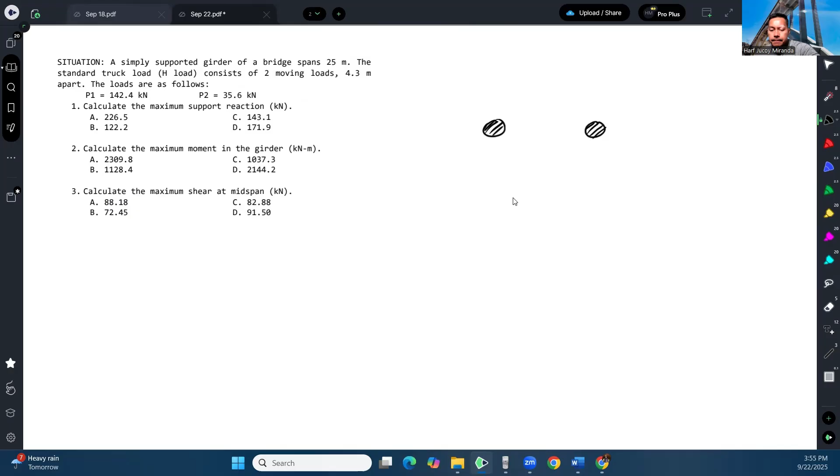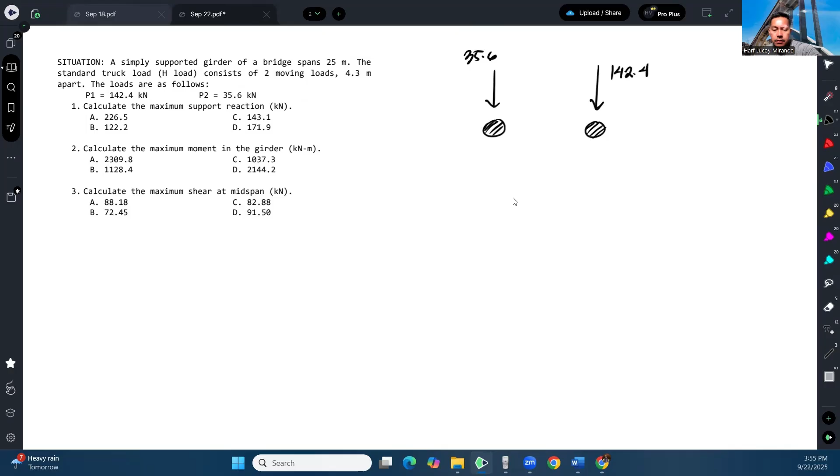Let's say these are the two moving loads. Let's say this is the heavier one, P1, and this is the lighter one, P2. According to the problem, they are 4.3 meters apart. So let's say this is our girder, 25 meters.

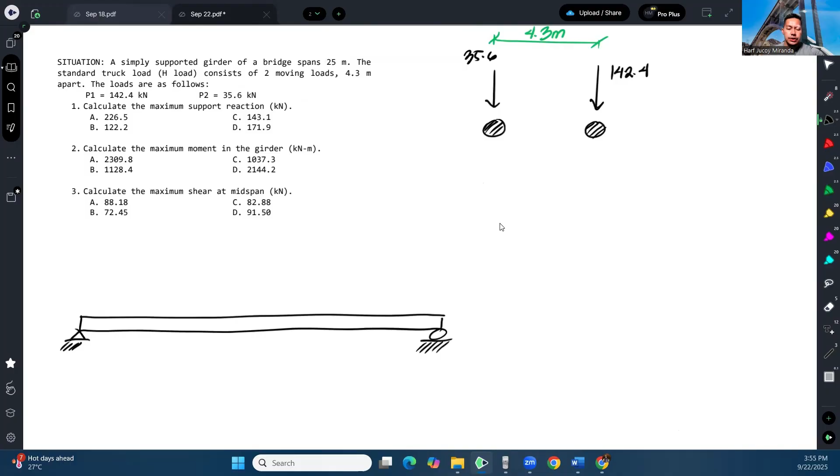So the first question: what will be the maximum support reaction? If you don't have any knowledge about influence lines yet, it's still easy to think about how we can get the maximum support reaction.

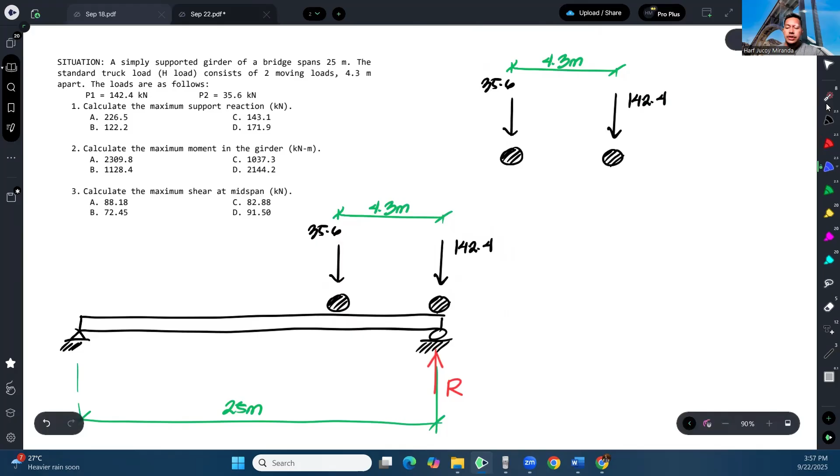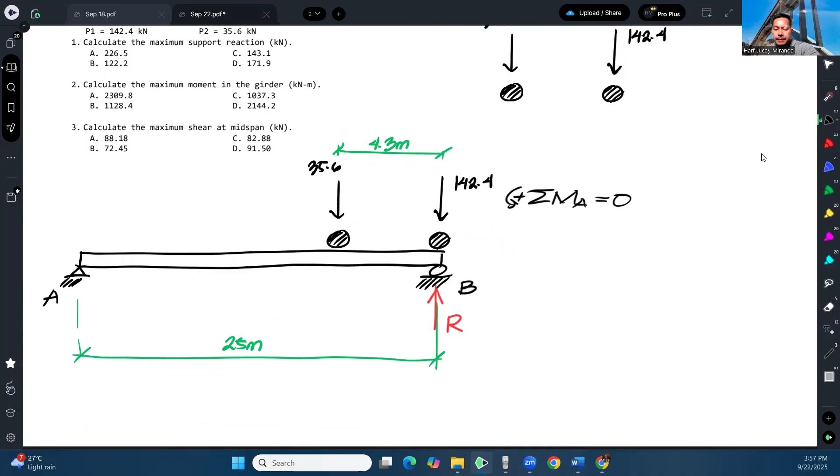Assuming counterclockwise is positive: we have 35.6 times the moment arm, which is this distance — that is just 25 minus 4.3 meters, and that is clockwise. Then 142.4 times 25, also clockwise. And then R will produce a counterclockwise moment. So that will give us our maximum reaction.

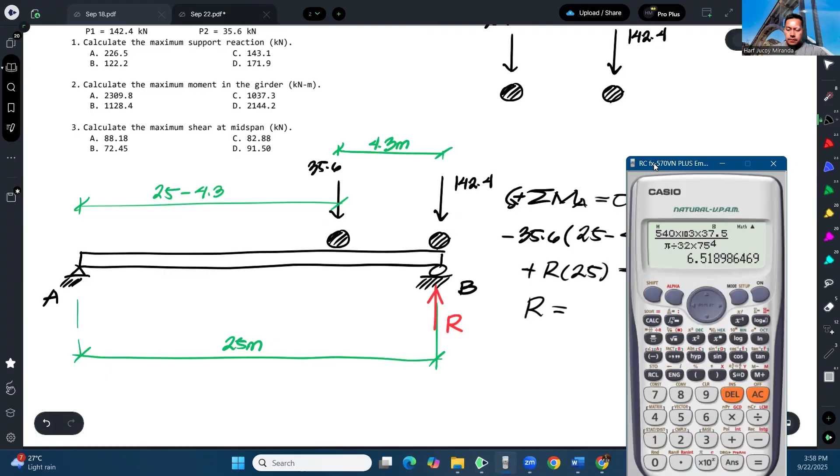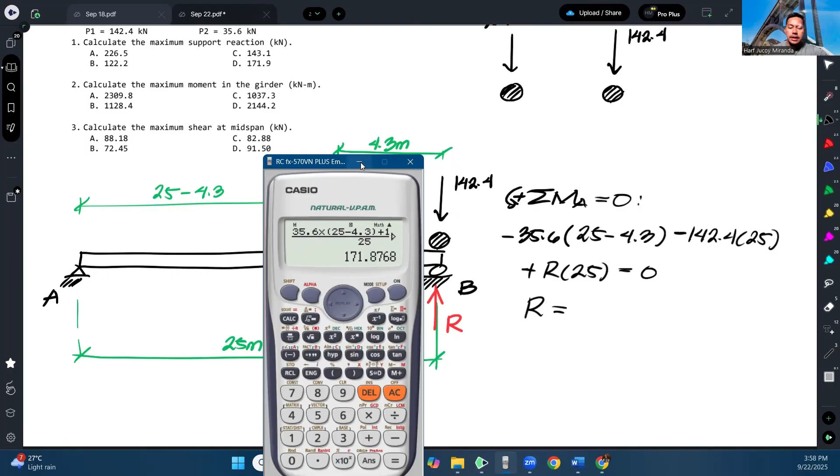So we have 35.6 times (25 minus 4.3) plus 142.4 times 25, over 25. That gives us 171.88 kilonewtons, and that will be our answer for the first question.

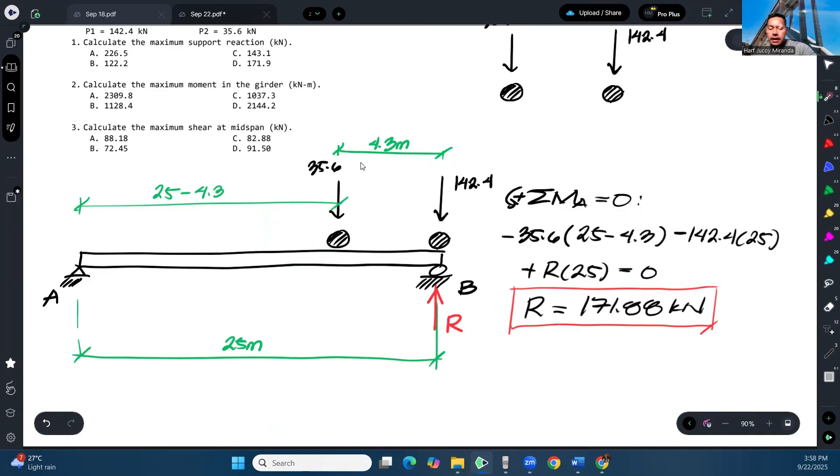So to get the maximum support reaction, we place the moving load right at that support, provided that the load you position there is the heaviest one. Then the other load, you want it to still be on the beam as well.

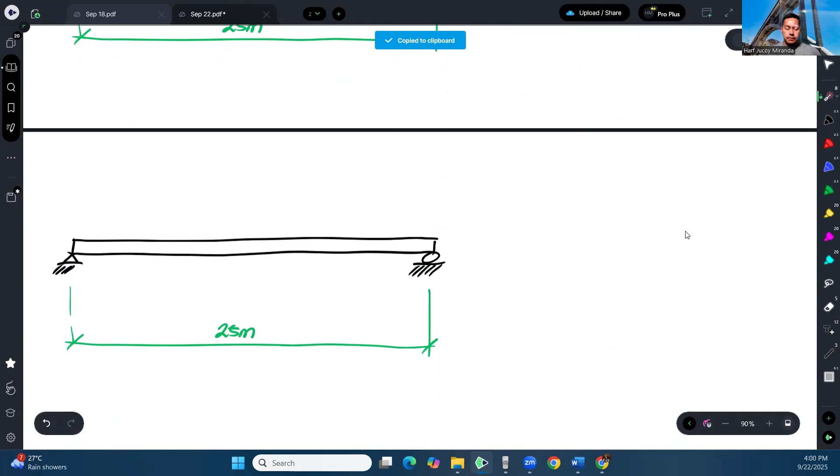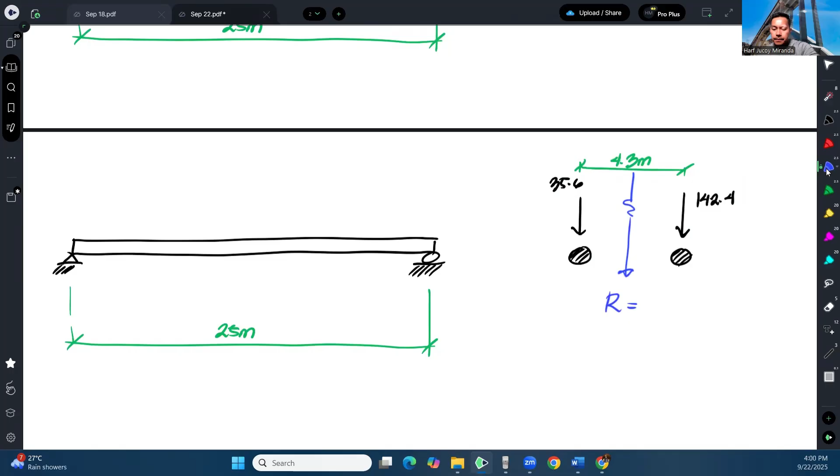Let's put the resultant down here. Let's say this is the resultant, R — which is just adding the two together: 35.6 plus 142.4. So that is 178.

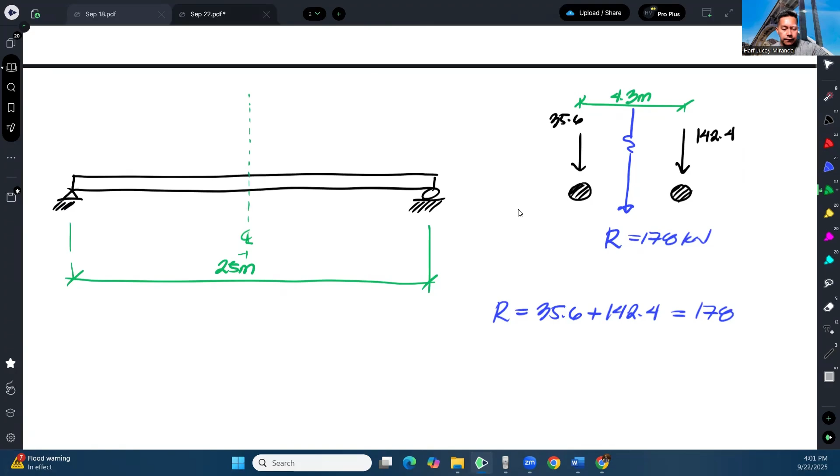So the rule to produce the maximum bending moment in the beam is that the center of the beam — this is the midpoint, so half of 25 is 12.5 on each side — the largest load and the resultant must straddle the centerline of the beam, positioned at the center like this. Once positioned that way, the maximum moment is found under the largest load, not at midspan — it's under the largest load.

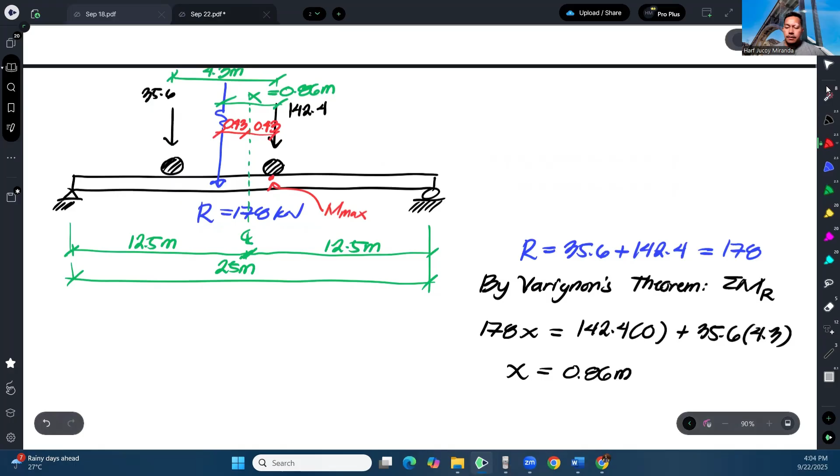Okay, in that position, let's solve for the reaction at B. So magsasummation tayo ng moment sa A equal to 0, assuming counterclockwise positive. Lipat ko lang to.

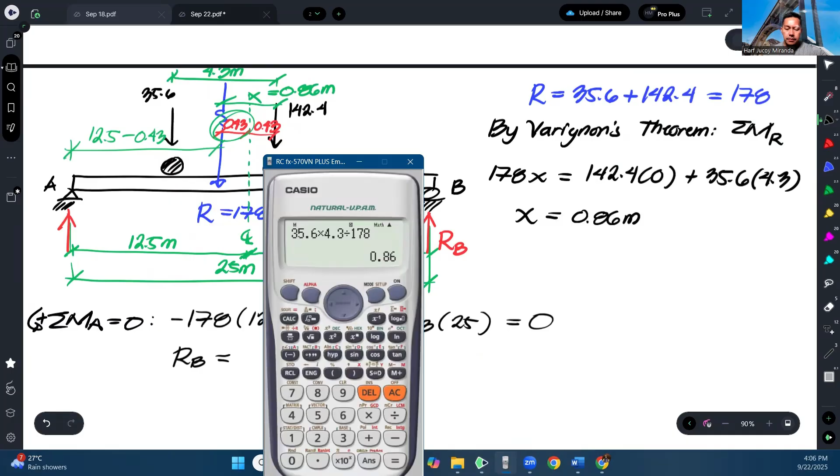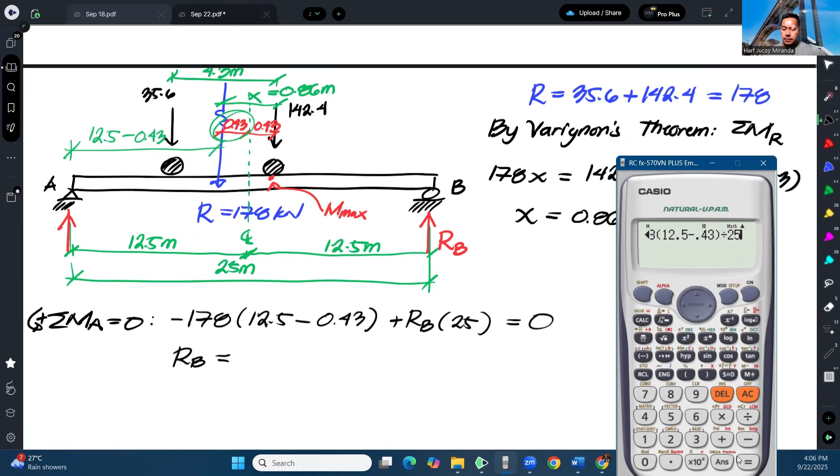So that is the reaction at B, 85.938.

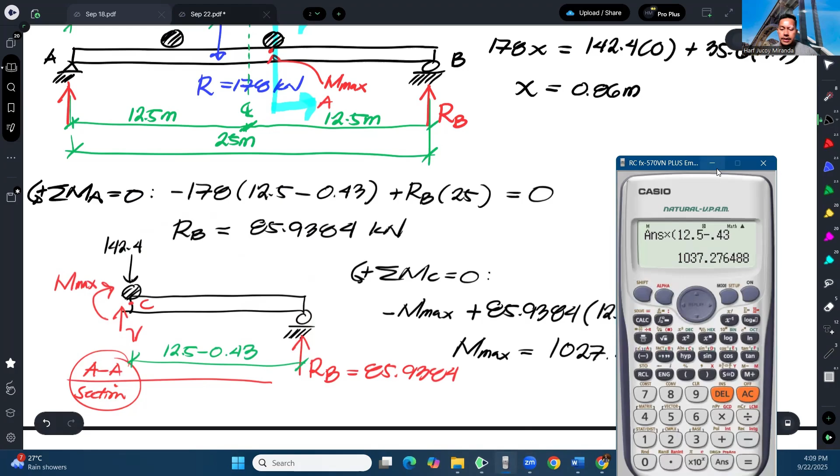Okay, and that gives us 1,037.28. 1,037 pala. Kilonewton meter. So that's our maximum moment. Okay?

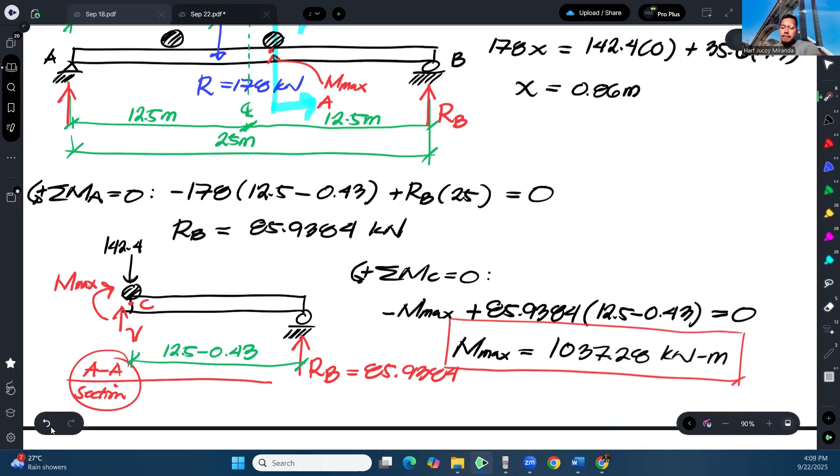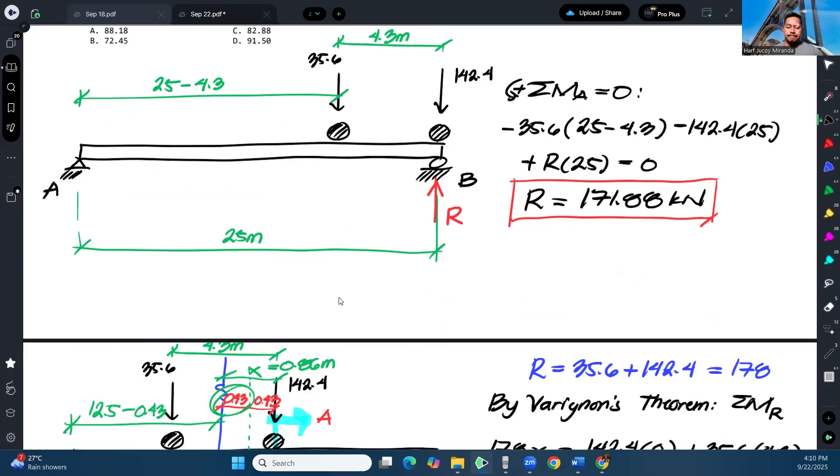So kanina ang sagot natin ay 171, tapos ngayon 1,037. Okay? So that's how we determine yung maximum moment kapag dalawang moving loads.

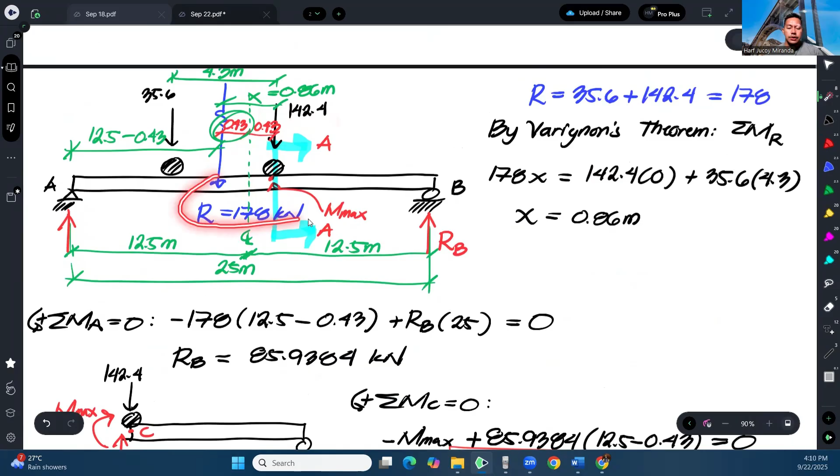Kapag tatlo or more, same idea guys. Papagitnaan natin itong center line ng beam nung largest load at nung resultant force. Okay? So that's how we determine the maximum moment.

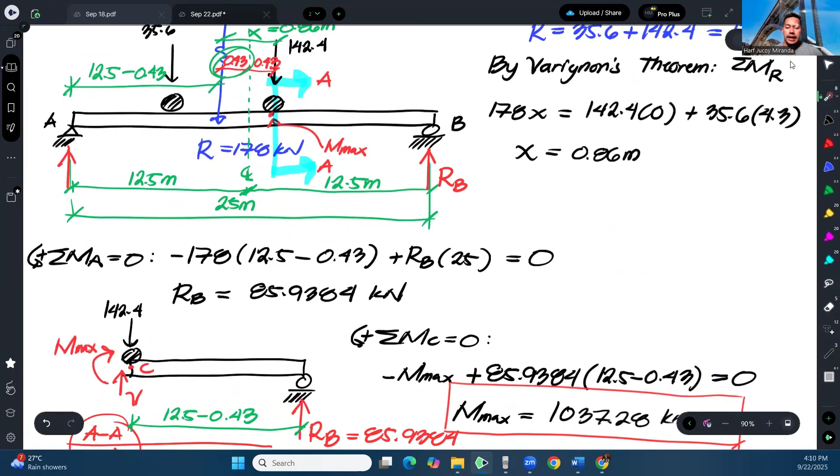Okay, alam ko may formula dito, kaya lang hindi ko recommended na i-memorize nyo yun kasi hindi siya sustainable. Unang-una, para lang yun sa specifically dalawang moving load. Kapag tatlo na or more, hindi mo na yun magagamit. Yung formula na meron, medyo mahaba rin kaya ayoko siyang i-memorize.

Okay, pero pwedeng i-derive dito kung gusto nyo. Bali, uulitin lang natin to lahat, pero magiging variable lang to lahat. Magiging R lang to, P1 to, P2 to. Mas makukuha mo yung X in terms of R, P1, and P2. Tsaka yung length pala, yung distance between them.

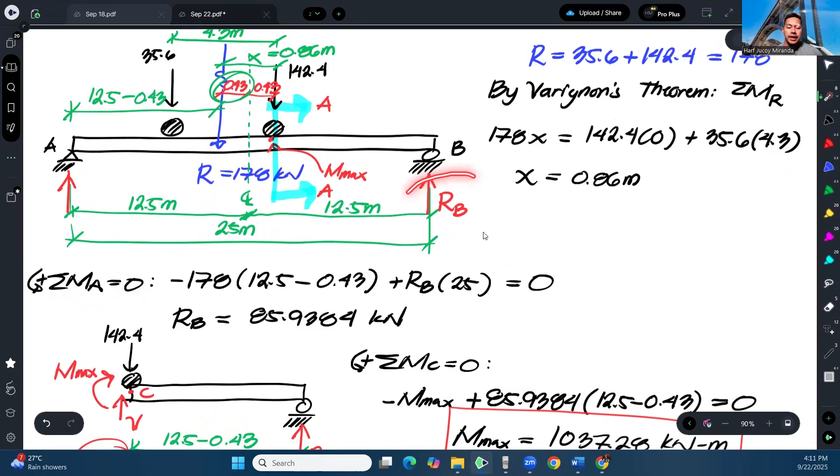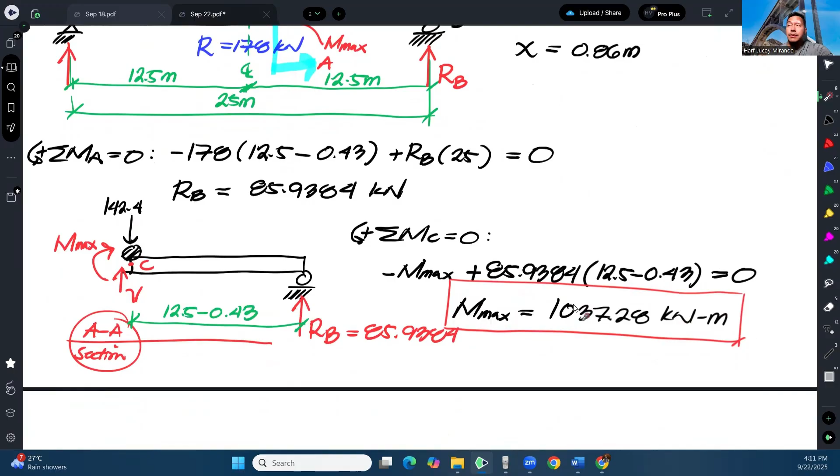Ito lang mismo ang gagawin. Mag-moment tayo, magka-cut tayo dito. Kukunin mo muna yung reaction, so makukuha mo yung reaction in terms of P1, P2, tsaka resultant. Tapos pagkatapos nun, magka-cut ka dito. Tapos pag nag-moment ka dito, you can solve for the Mmax, in terms of P1, P2, yung distance between them.

Okay, so that's for number two. For number three, what is the maximum shear at the midspan? So ano naman daw yung maximum shear sa midspan? Nakaspecify na sa midspan yung hinahanap. So malamang, ang gusto natin gawin dyan ay ipatong itong largest load dun sa midspan mismo. Okay, so yun yung idea. So gawin natin.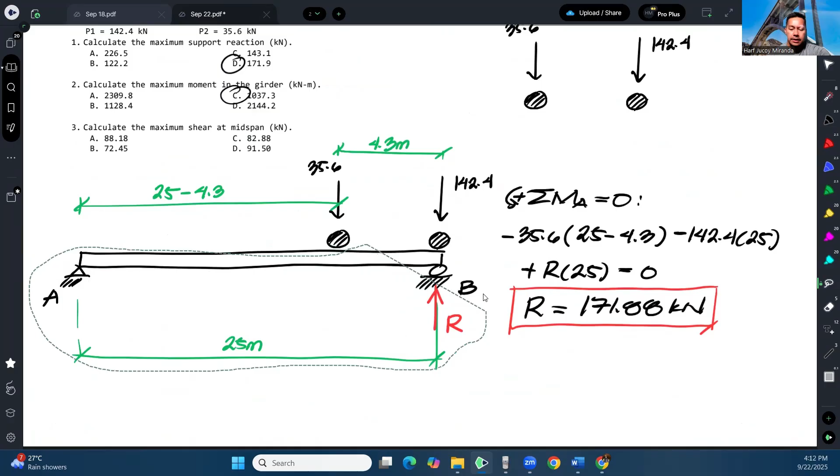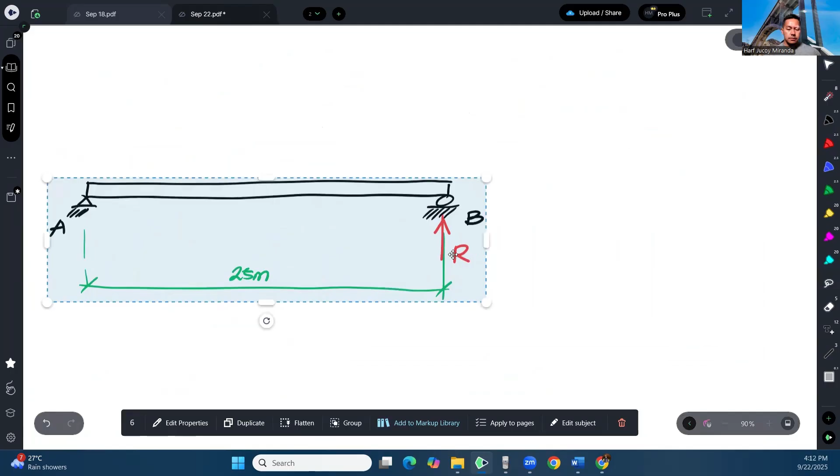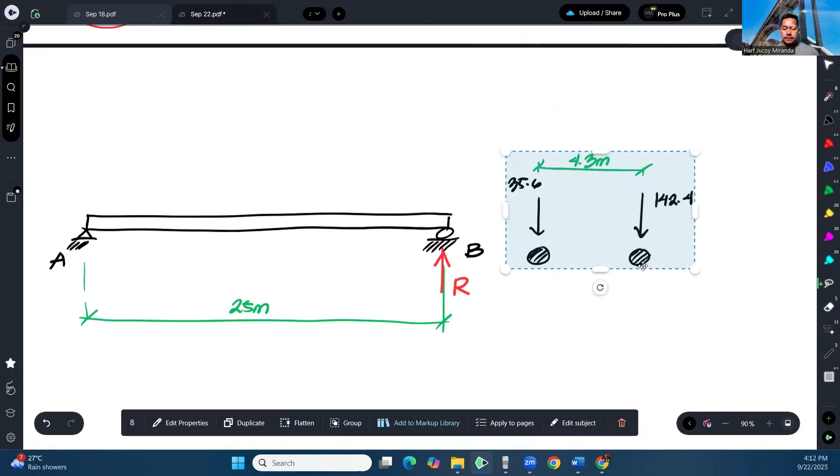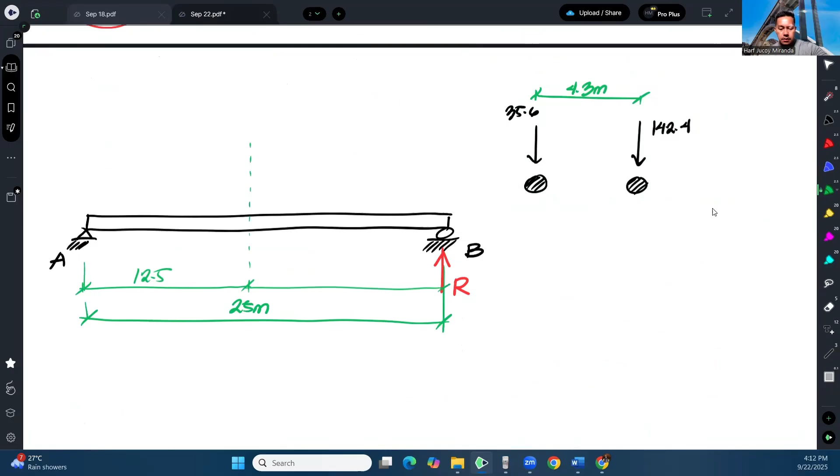Open ko lang tong beam na to. Ayan. So gusto niya sa midspan. So di ba ito yung midspan? Gitna to. Ayan, shear sa midspan. So lalagay natin dyan. Patong mo siya dyan. Ayan. Tapos hanapin natin yung shear dyan, okay, sa midspan, in that position.

Alright, so para makuha yun, once again, kukunin ko lang yung reaction R. So mag-moment lang ako sa A, again equal to 0, assuming counterclockwise positive. So this time, ano na to? Pwede natin kunin yung resultant ulit. Di ba yung resultant nandito? 178, so pwede yung resultant na lang ulit yung gamitin natin.

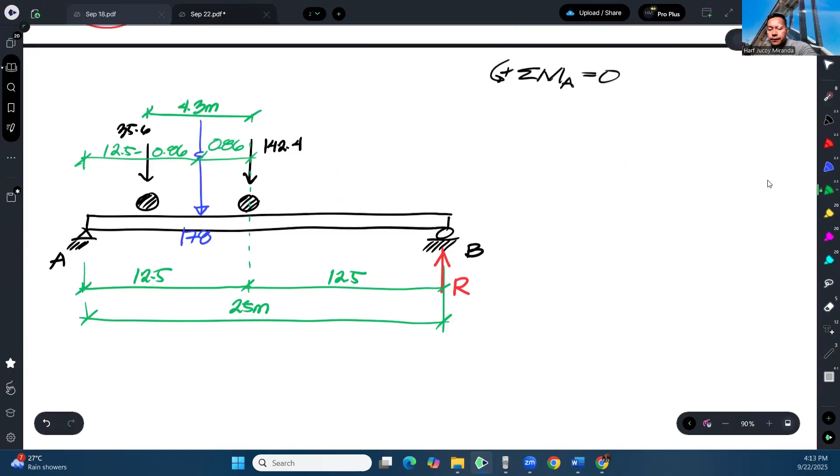Tapos ito, 0.86, di ba? So ibig sabihin, yung distance ni resultant from the left ay 12.5 minus 0.86. So therefore, we have 178 times 12.5 minus 0.86 clockwise, and then yung reaction sa B times 25 counterclockwise. So we can solve for the reaction at B.

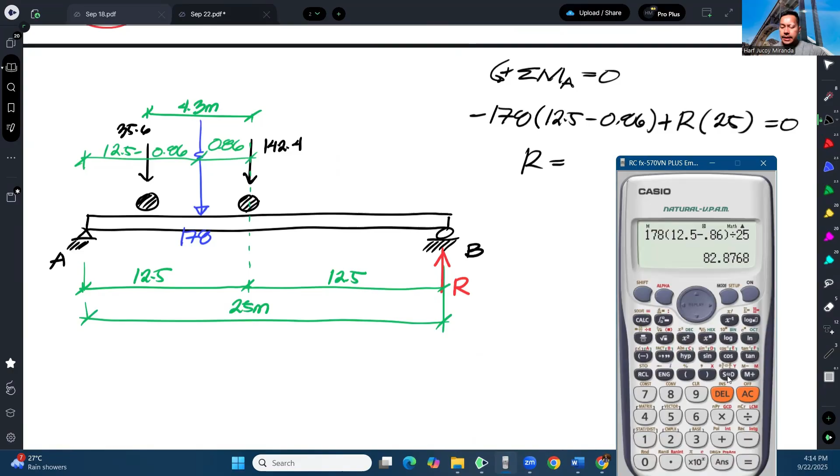So that is 82.88 kilonewtons. So yun yung reaction dito.

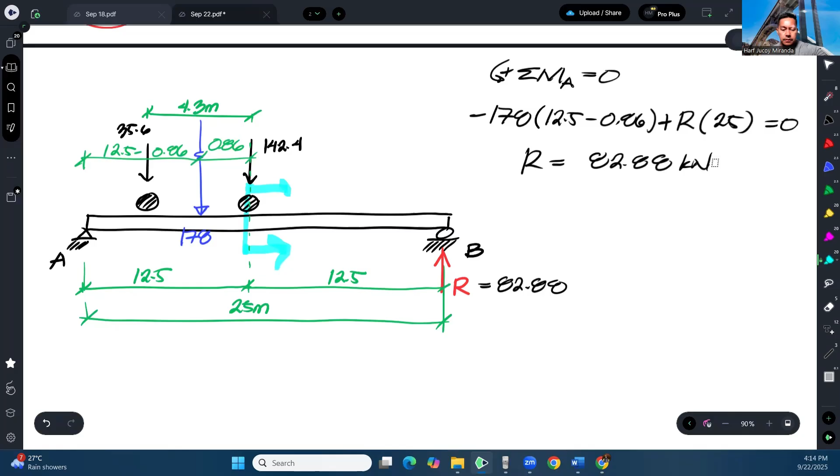And then, para ma-solve natin yung shear dito sa midspan, ganun ulit, magme-method of section tayo. Cut natin to. Okay, tawagin ko naman to na section BB. So yung section BB natin, ito yung itsura.

Okay, so meron ditong force na 142.4. Tapos meron ditong shear. Yan, at ina-expect natin na yan na yung maximum shear.

Okay, so medyo tricky ng kaunti itong section BB na to. So itong section na to, we are assuming guys na lagpas na ng konting-konti sa load na to. Nandun na siya sa right side eh, kasi di ba itong load na to nandito yan eh. So let's say ito ay lagpas ng konting-konti doon.

So practically wala na to, hindi to kasali dun sa section na nasa right. Okay? So with that said, kung mapapansin, pag nag-summation of forces tayo Y, klarong-klaro na yung maximum shear ay equal sa 82.88 kilonewtons. And that will be our answer here.

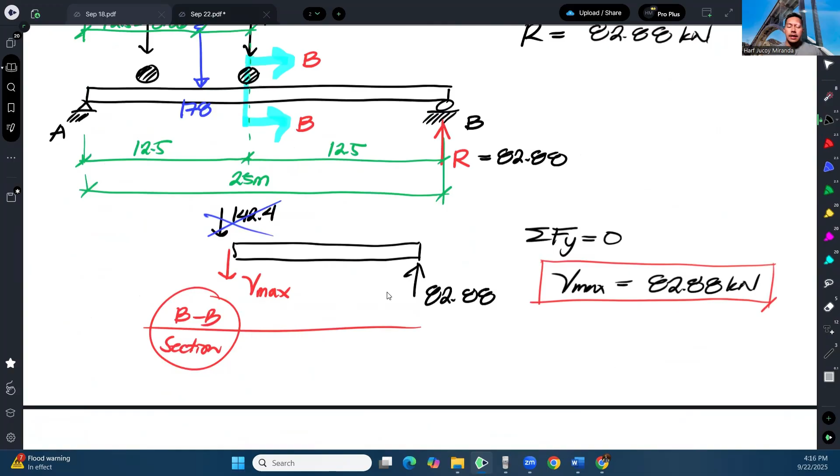Okay, another way is by simply drawing the shear diagram. Pwede naman natin din i-drawing yung shear diagram dito. Yun nga lang, kailangan natin kunin yung reaction dito sa left side. So gawin din natin yun, pakita ko lang din, para lang meron tayong option. Ayan, so kunin natin yung reaction dito sa left. I-diretsuhin ko na lang ha.

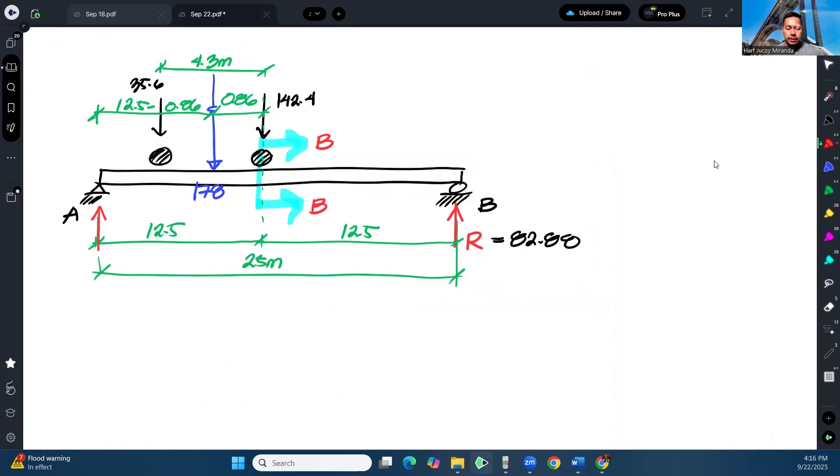Bali, 178 minus answer. Ayan, so ito yung reaction sa left, 95.12. Tapos kapag dinrawing natin yung shear diagram,

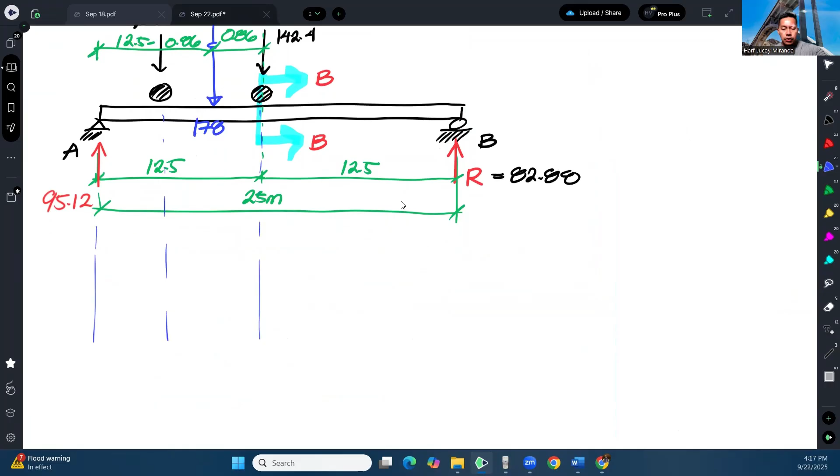note, wag natin isasama yung resultant ha, yung actual load ilalagay natin. So this is going to be 95.12. Pagdating dito, mamaminosan ng 35.6, so that is 59.52. Pagdating dito, mamaminosan ng 142.4.

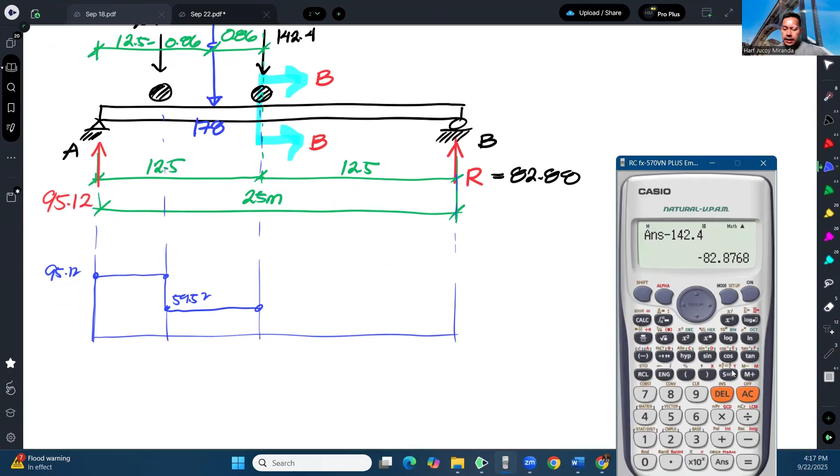That is negative 82.88. Okay, tapos pagdating dito, mapaplasa ng 82.88. So ayan, yan yung shear diagram natin.

And dito, klarong-klaro na ang maximum shear sa midspan. Dalawa yung shear sa midspan: itong 59.52 at saka itong 82.88. Itong 59.52, ito yung just to the left side. Ito namang 82.88, ito nasa right side.

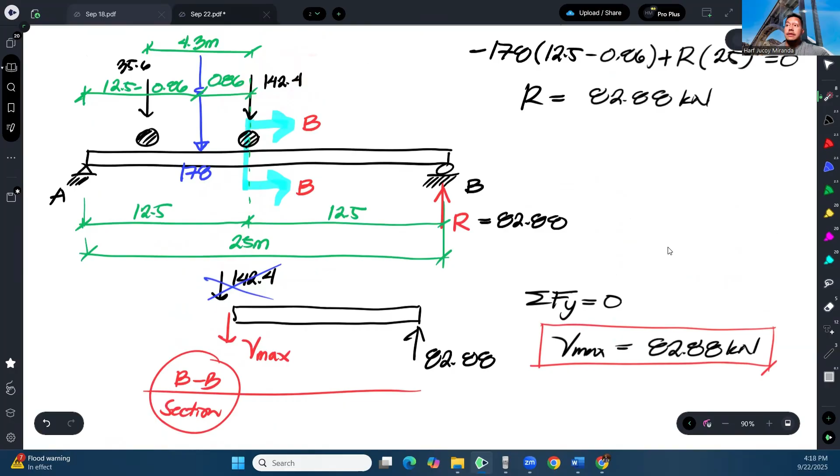Okay, kaya nga sabi ko kanina, nung nag-method of section ako, nung sinosolve natin to just to the right, hindi natin to sinama, kasi kapag just to the right, nalagpasan na yan eh. Pero kung method of section tayo, tapos sa left tayo nakatingin, kasali to. So kasama yan, dapat dito tayo sa left nakatingin. So anyway, as you can see here, ito pa rin yung sagot natin na Vmax at the midspan ay equal sa 82.88 kilonewtons.

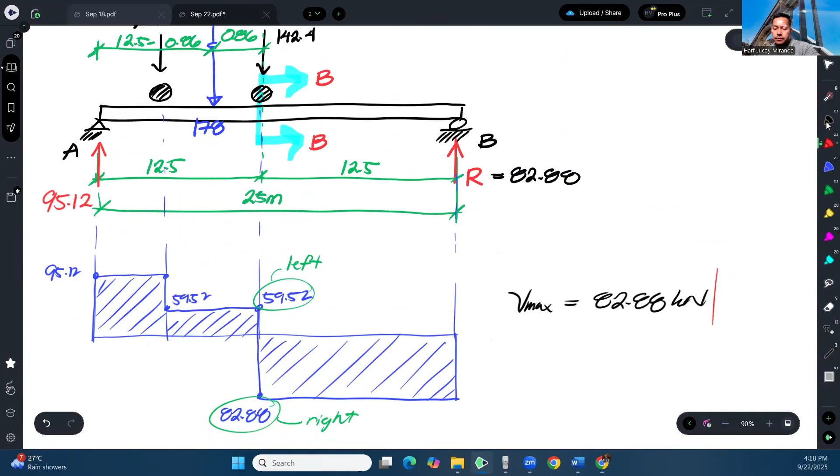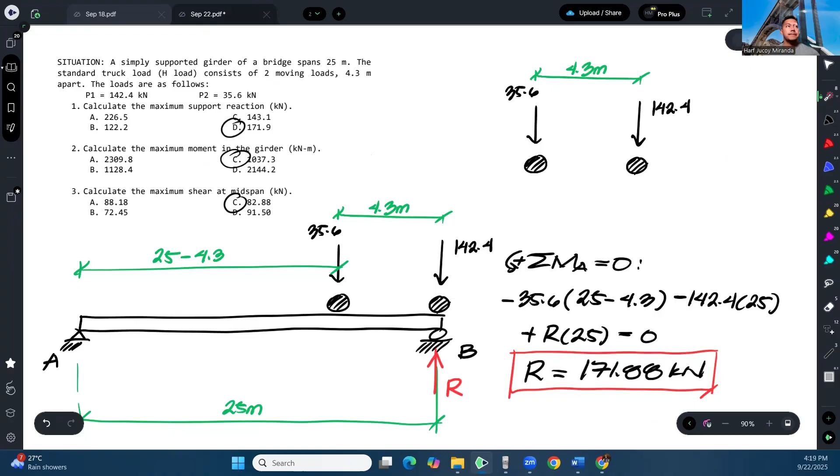And of course, pwede rin ito ma-solve ng influence line, pero let me have a different example in discussing influence line later on. So for now, that's our solution for this specific problem, and that's how we solve this problem.